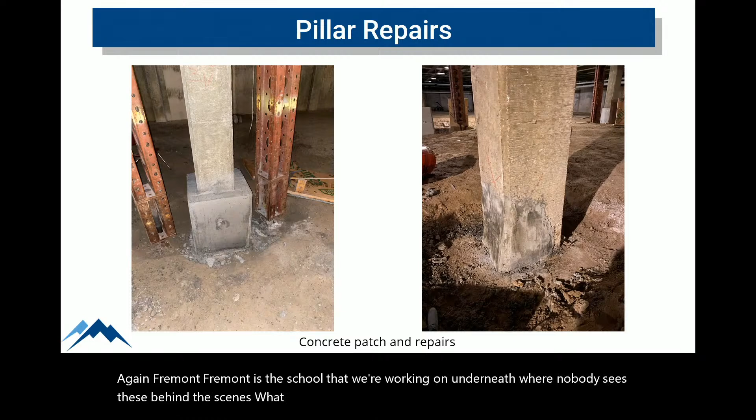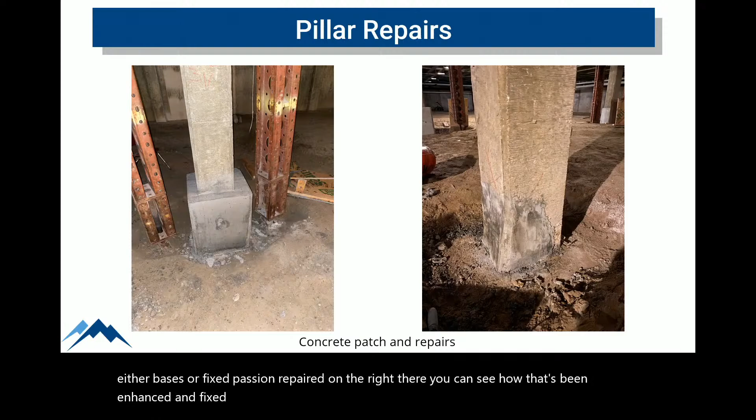And then Fremont. Fremont is the school that we're working on underneath, where nobody sees these behind the scenes, but our concrete piers and columns have had some issues over the years. So we've gone back, and you can see where we've added concrete, either bases or fixed, patched and repaired on the right there. You can see how that's been enhanced and fixed and strengthened so that we don't have opportunities for the building to be weakened in the future.

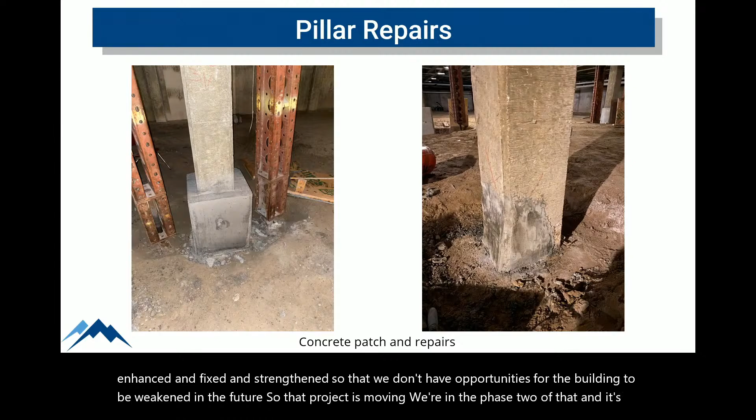So that project is moving. We're into phase 2 of that, and as far as we've been told, it's not interrupting anything at the school. They're just working down in the crawl space basement there, if you will, and trying to get that done by the first of the year.

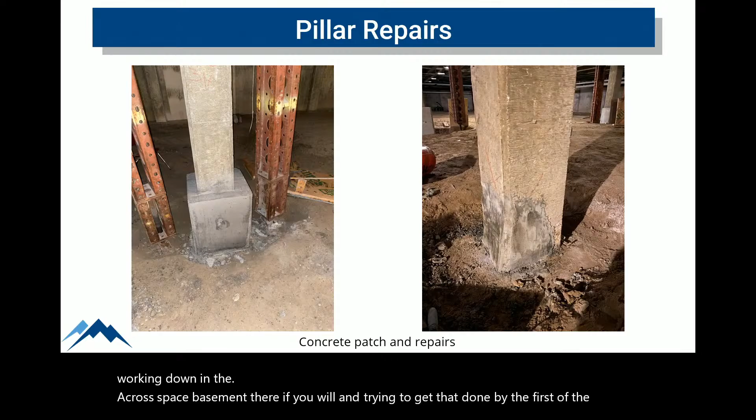Finishing up our GEC chiller replacement here. Again, one of the things that had us greatly concerned is that these chillers do cool our data center. So it's not about the comfort of us as district employees, but it's about the comfort of the servers that keep all of our data.

And so we have chillers online, and we just have some control work to finish up. But at this stage, the primary cooling is back, and the backup for the data center has occurred. So we feel pretty good where we're at. And yes, we have to have chillers running in the winter in the data center, so we may heat this building, but we sure as heck cool the rest of it.

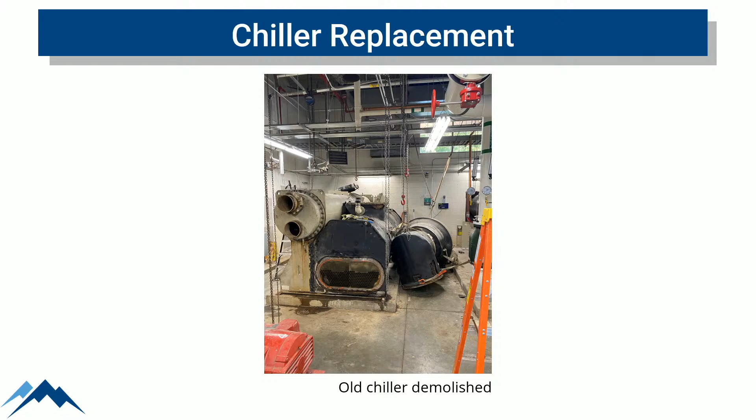And then this very large chiller has been demolished. It took a little over 2 days to cut it up in sections and take it out. Big pieces of equipment from the original hospital. They've served the hospital and the district well for darn near 30 years, and it was a good time to replace. Continuing on some of our HVAC type controls, Hunter Elementary had an emergency boiler replacement.

The boiler went out. These are very long lead items these days, so we've been fortunate to get the boilers up and running. We have one running, which is adequate enough to heat the school right now as we work through our controls issues. On October 24th, we were able to fire up that boiler, and the school will be comfortable as the winter season comes online.

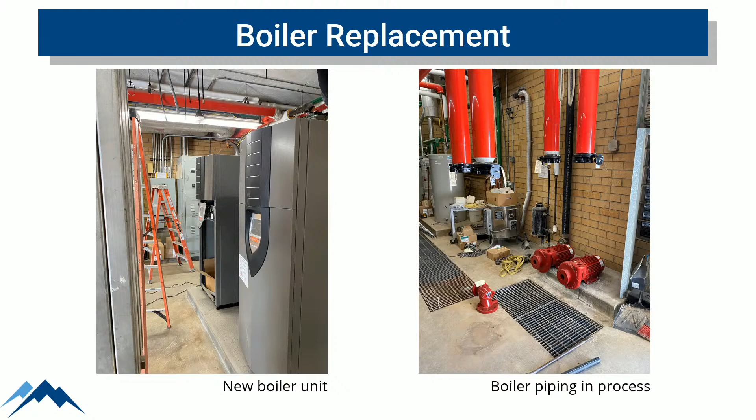We'll also be tracking these through our energy management software to see how much more efficient these systems are, and what that does to our bills, and how it affects our energy consumption, both on the electrical and gas side of the operation.

Hunter High School is getting an awful lot of controls upgrades. When this school was built in the 90s, we used a lot of pneumatic systems. Believe it or not, we control everything with compression and vacuum, opening and closing hundreds and hundreds of little valve boxes in the air conditioning system, and that's severely outdated and breaks and leaks often. This new controls upgrade takes it to little electric motors that are much more programmable, which aids in healthy circulation of air as well as comfort to our students.

Shift now to new construction and Skyline High School. The punch list work is ongoing in the new gymnasium, patching up a little paint here, defect there, and that will continue for a little while, working around the students.

Outside, around the new gymnasium, we have the underground utilities going in, continuing for the academic building that's started. We'll show you some slides in a minute. Tilt-up panels have started for that, and some of the structural steel, which we'll show you here in a second. There's the slide looking basically straight north.

The blue up to the right is where the tennis courts will be, the football field to the far right, and then the synthetic soccer field and lacrosse field straight away, and the soccer field to the left is new grass. What you don't see, and you'll see in a minute, is all over to the far left is the new softball field, and we've actually got the sod down, which is awesome.

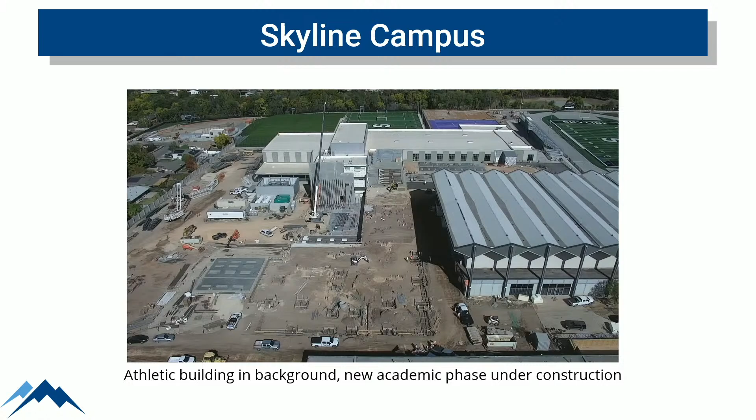Would you mind going back just real quick? What you're looking at right in the middle is the old gym to the right, but where they're building, and see that large crane, they're standing panels, and there's one panel already stood there right in the middle for continuation of that main hallway that comes from the far north, athletics, all the way to the south, which is where the new auditorium will be. So that's a main corridor there, if you will.

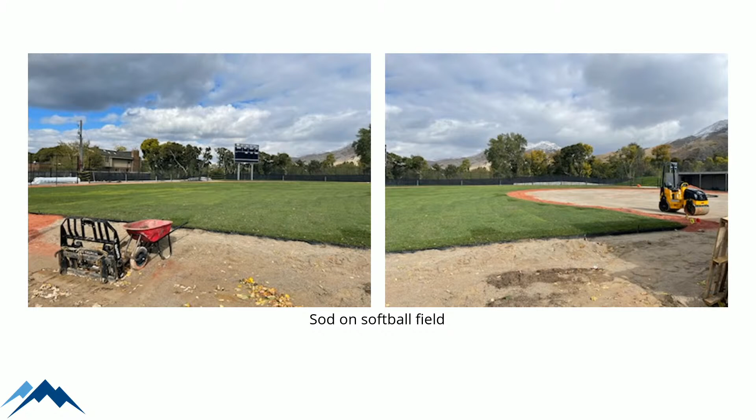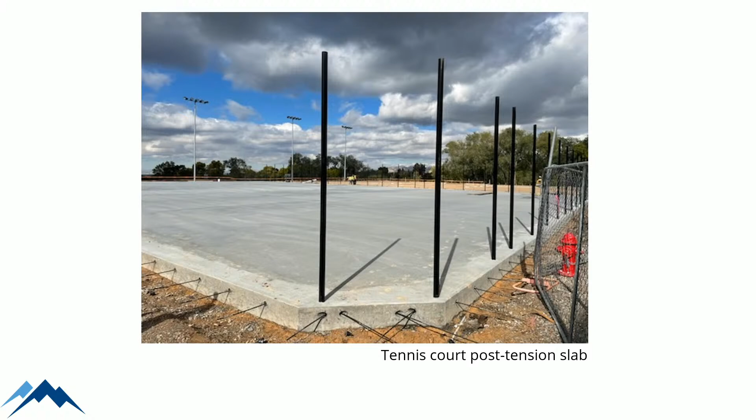This is where that blue part of the tennis court was. Now you see the concrete there, the cables, the post-tension cables, and we've got some of the poles going in for the fence. Exciting, the tennis courts are progressing, which will be open for the fall season next year.

Under the financials, there was a change order last month that you, as the board, approved for Skyline, and one for Cyprus, which we'll talk about in a minute. We didn't roll those into the budget until you approved them, and now they've been rolled in here. That's really the main change on the financials for Skyline this last month.

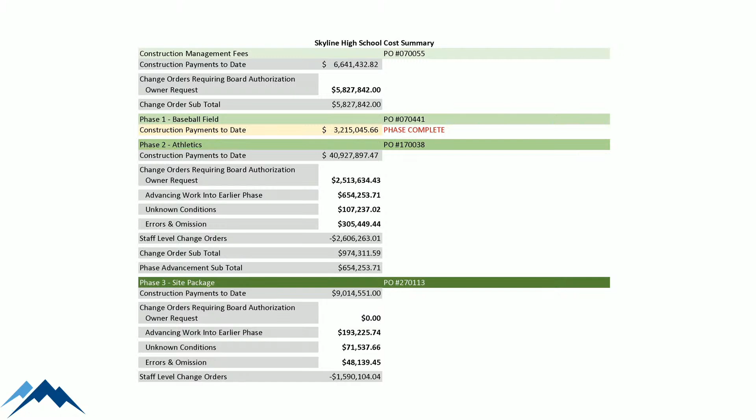The previous slide showed that we did close out the baseball package, so that's fun to have things kind of wrapped up to that point. That's Skyline. Moving on to Cyprus.

Cyprus is seeing a lot of activity on the site. Our retaining walls that go around the front of the building are about 90% complete, keeping that parking lot at grade and nice and level for ADA accessibility. We're working diligently on the stormwater retention chambers.

We'll show you some images of those, very deep holes, I think 17 to 20 feet deep depending on where we're at, and then filling those up with the appropriate storm drain chambers. Gymnasium and pool tilt walls have been erected, and the orchestra pit and other floors in the auditorium have gone up. The auditorium tilt is weather-wind dependent as it sets itself, so they're waiting for those calm days to stand those very large panels up.

Tons of steel truss going on at Cyprus as well. It's really starting to look like a building. This is the athletics package side. If you were out there today, you're really looking at 25% of the roof deck in this image. We're probably 90% done today, so it's moving along very rapidly.

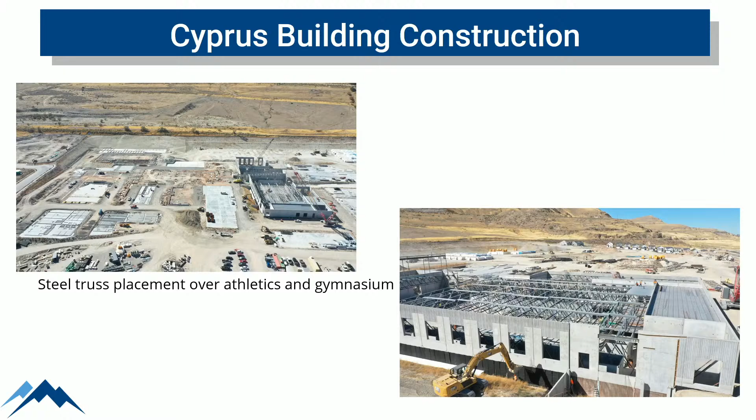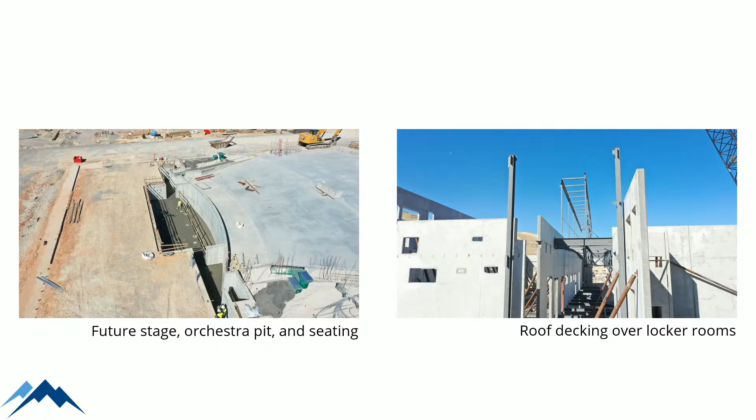Backfill along the outside of the building is progressing nicely as well. This shows you the future stage and orchestra pit, and then the flat work to the right is the seating for the orchestra. You're starting to see that roof deck go on over the locker rooms, and again we're closer to 90% complete today. Those are your storm water chambers going in, and a good look at those terraced retaining walls as well.

So the earthwork continues rapidly, and it's moving at such a pace that we're even starting to do footing and foundation work for the concession stands out by the auditoriums. We're starting to progress away from the footprint to allow us to get some of those buildings set, so we'll start to get into field work and other things on the site. It is moving at a pretty good pace, as you'd expect in a greenfield site instead of working around an active school.

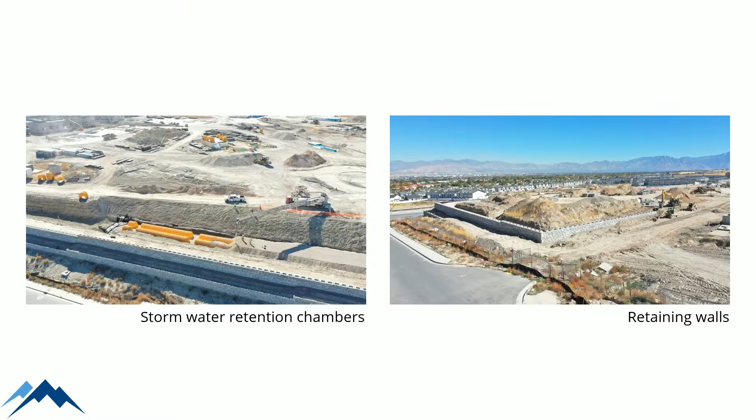As Justin mentioned, we had change order 14 approved by the board for $161,000 for the additional soils conditions we encountered out there, and that's been incorporated in. We are current on change orders for that.

At West Lake STEM Junior High School, things are moving along very well. I know some of you get to drive by it on your commute. Super excited with its progress. We're starting to see not only steelwork go up, but the masons have been busy on the gymnasium section, and we have about 75% of the slab done. We're starting to get some good interior framing occurring, even though it's not in these pictures.

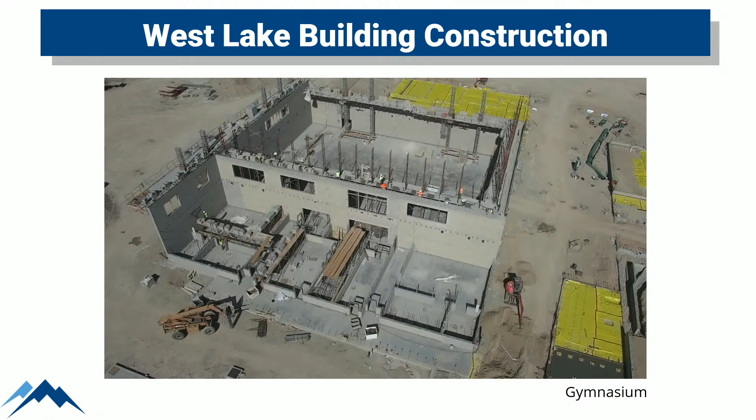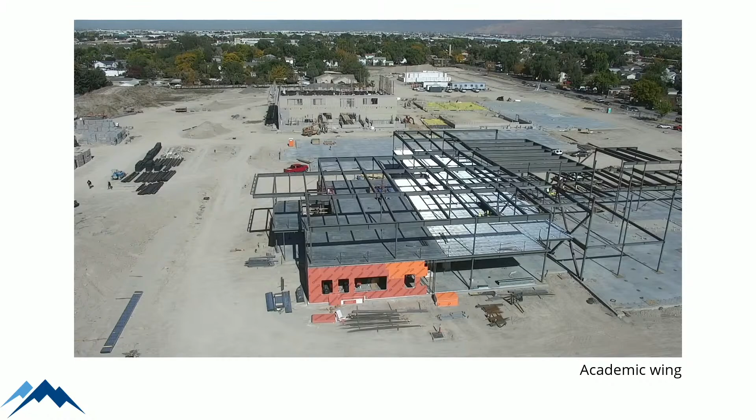You're starting to see that gymnasium structure in the back of house that's going in, kind of the small rooms to the lower part of the picture. That's your back of house, including some of our equipment and storage areas. Our academic wings are starting to actually see some exterior sheathing go on, on the west side, southwestmost corner of the academics. You're starting to see some of those interior framing projects going in.

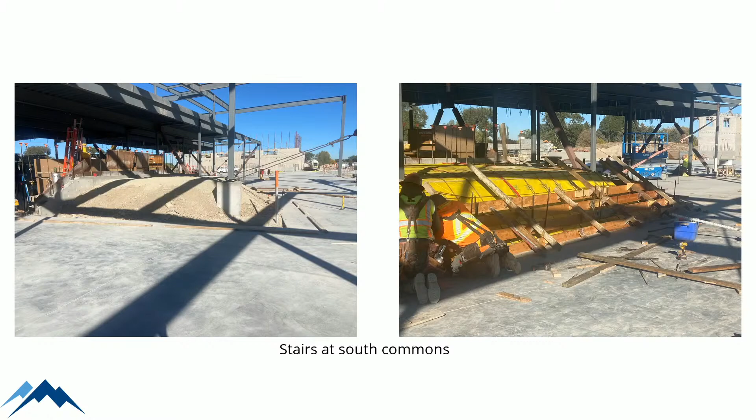Mounting up some earth as part of the main stairway that gets you up to the second level. We had preparation for the paving of the north parking lot, so we're moving even on some site work there. The library and teacher collaboration areas are center and prominent in the building, and that's where a lot of our glass work will be to let in natural light, even on a curved wall. That's a very aesthetically pleasing part of the building.

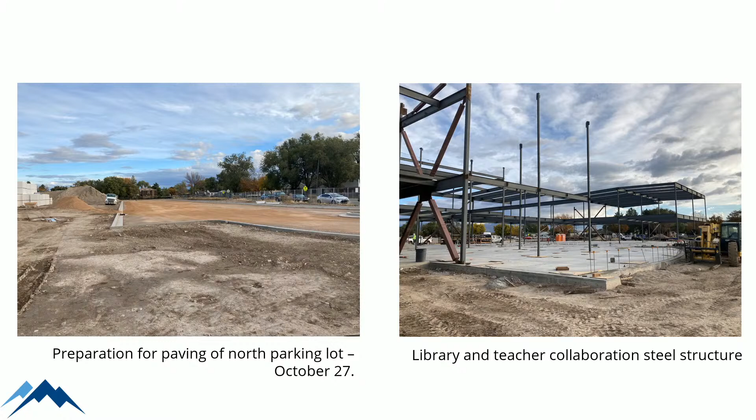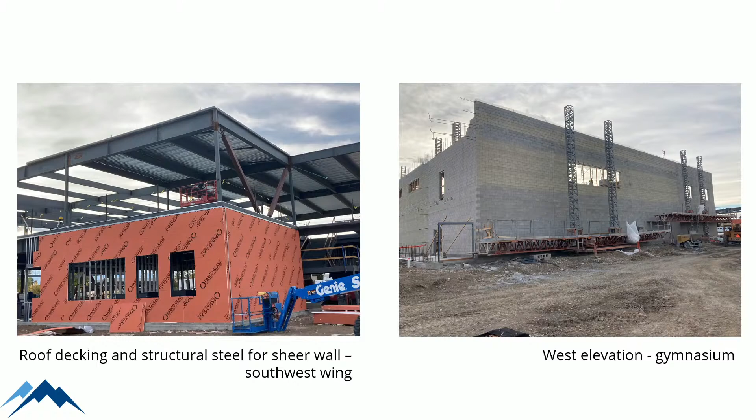Again, starting to see some of that roof decking appear, so they're moving quickly to try to get dried in as much as possible. The west elevation on the gymnasium shows the amount of daylight we're trying to incorporate into the gym section. This happened to be about 8:45 in the morning, the golden hour of sunrise, and that's the gymnasium interior wall you're looking at. They were pretty much topping it out over the last couple of days.

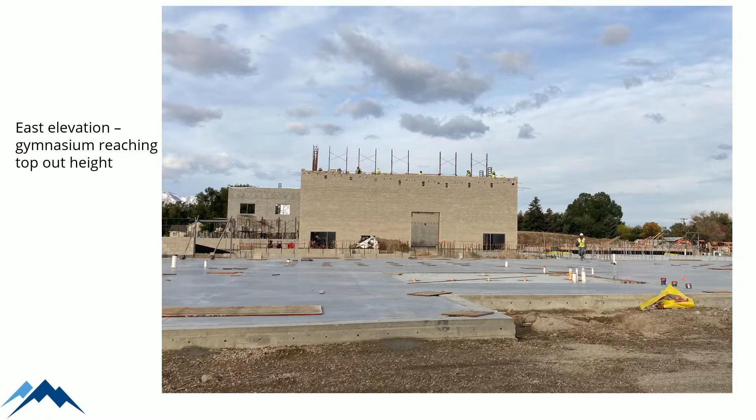So solid progress at Westlake, and no real change orders to talk about at this stage after we approved the one that was a request from West Valley City. We did that last month as well, if you recall. They needed some site improvements, sidewalk changes, etc.

That takes us fairly current on our projects.

Any questions for us? As the weather gets cold, how much will that delay things, or what does that look like?

Cold really doesn't concern us as much as moisture. Snowfall and rainfall can change the construction cycle of a site. We can do most of the work we need to through the winter, but it does slow us. If summer runs at 100%, do I think winter will run at 80 or 85%? If it's a tough winter, you bet. If we don't have our concrete slabs down, that makes it even more of a challenge, but we can heat our concrete, use concrete blankets, even add heaters to the ground and slabs if we need to keep it moving. All the contractors do have winter conditions and winter money in place in their contracts, because we're in Utah and you have to.

So we expect to just keep motoring through.

Can you remind me the tentative completion date of Westlake? I got that question and I couldn't remember. Summer of 2024 is when we're attempting to take occupancy of that and get it ready for the start of the 24-25 school year. So fall of 24-25, the hope is to have students fully in.